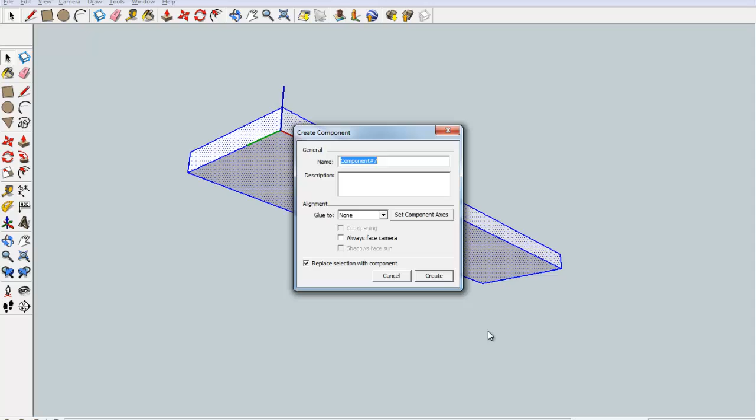So I'll take my cursor tool, draw a box around the entire frame, right click on it, make component, and I'll call that frame. Now I don't have to worry about sticky geometry like we talked about before.

I'll zoom in on one of these sides here, grab my circle tool. On this edge, I'll find the midpoint of this line and reference the circle over, and start to draw that. I'm going to give that a 1/16 inch diameter, so 1/16.

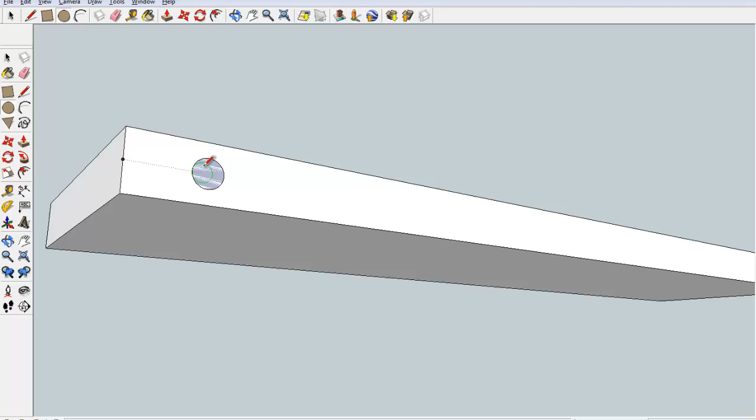Then I will find the center of that circle by hovering on the outside edge here, and it'll snap to the center, and then I'll draw 1/32, so 1/32, enter.

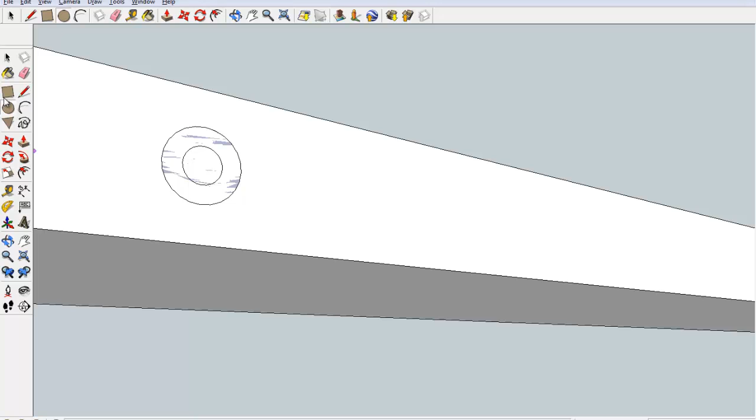This gives me two circles that represent what I need for the eye hook. Now I'll take my push-pull tool and bring this surface out 1/32, and there it is. I can now draw a box around this, and it only selected that, and I can move this down.

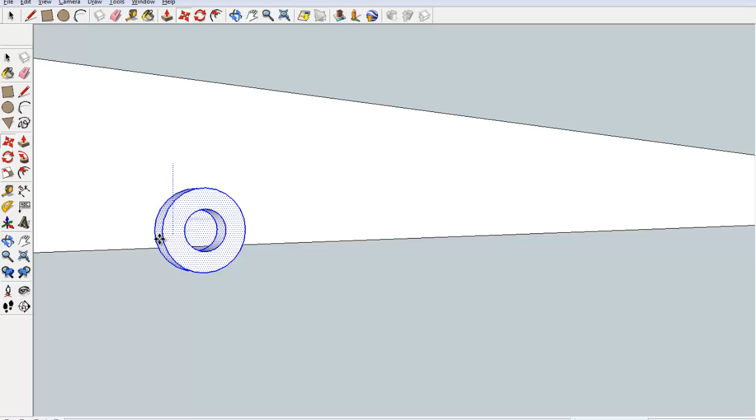You'll notice that there's a solid surface here. I can right click on that and hit erase, and now that's hollow.

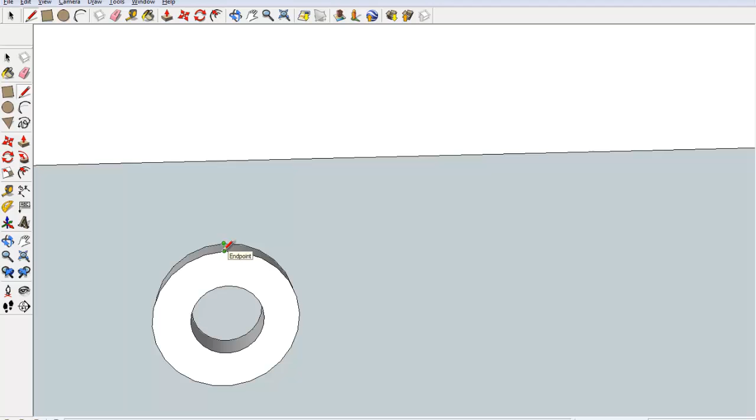Now one last thing I want to do is across the top edge here, I'm going to draw a line across, then find the midpoint of that line and draw a line up a little bit. Make sure you get on an axis so you're going straight up. You'll see what that's for in a second.

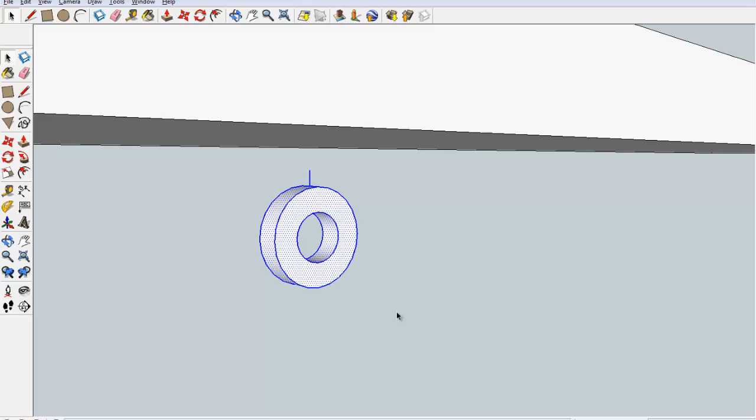I can now draw a box with my cursor around the eye hook, right click, make component, and I'm going to call this eye hook.

Okay, now I need to place these onto the bottom of the frame. To do that, I'm going to locate where one of them goes. I'll use my tape measure tool, find a midpoint and draw a line. I'm going to go in 1/4 of an inch, so 0.25. I will also come from this edge in 0.25.

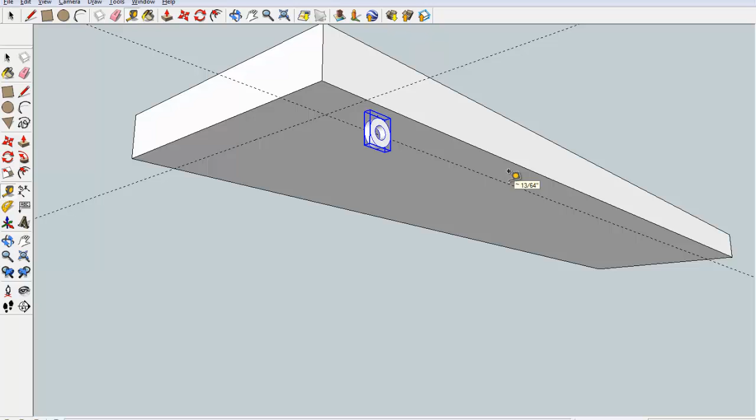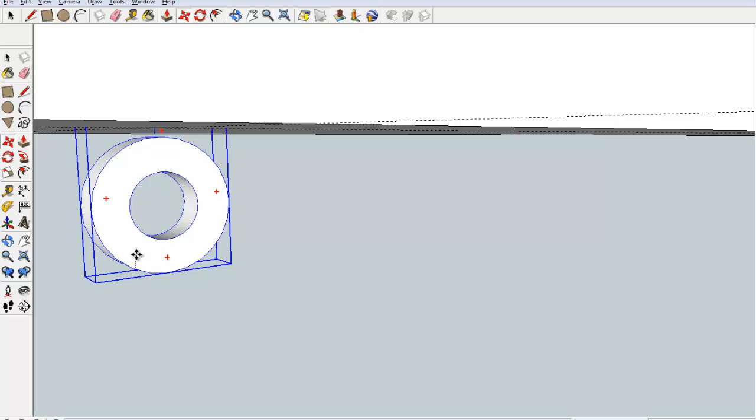Now to move this, to make my job easier, I'm going to grab the end of that line by that point and connect it to where these two lines cross, that intersection. Then I can push this straight up until it touches the surface there, and that would be the correct location for the eye hook.

I've already accurately found where one of them goes. Now this is actually easy to get the other points. I know that this is 1.5 inches wide, and I have 1/4 of an inch here. I should have 1/4 of an inch here. That leaves a 1 inch difference.

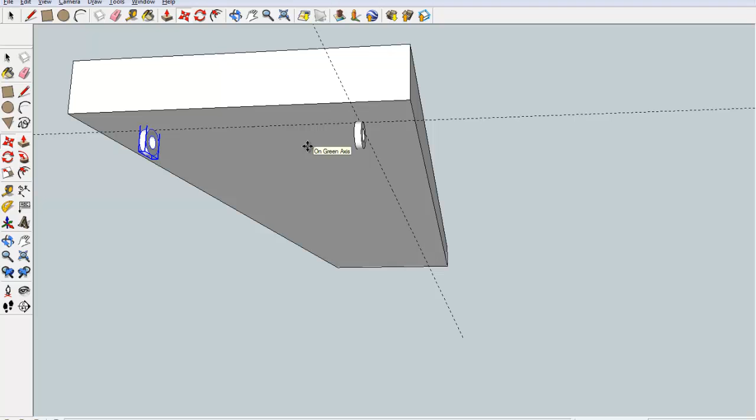So with your move tool, grab the eye hook, slide it over. You'll see that axis line - yours might be a different color - and you're going to move it over 1 inch. But before you hit 1, hit Control to make the copy. 1, enter, and there it gives you your other one.

Now I know that this block of wood is 6 inches long, so I need to move both of these 5.5 inches. So I'm going to take my cursor, hold down the Control key, select both of these, and then move them. I'm going to hit Control to make a copy of them first, and move them down 5.5 inches, 5.5.

And now I have my eye hooks all in place.

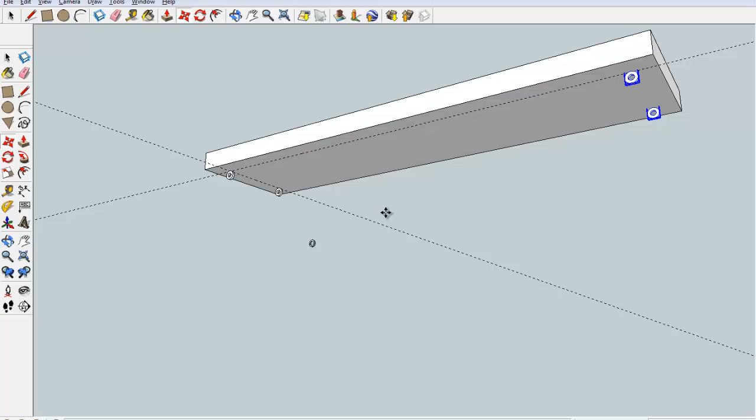Alright, go through that video, watch it step by step, pause it when you need to, and then you can have all your eye hooks in place, and the next step will be placing the axles in.